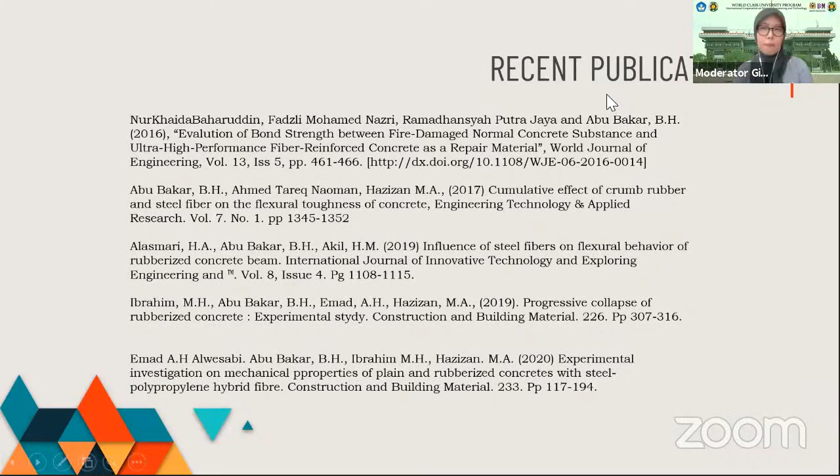He has also supervised and examined more than 23 supervisions. The latest of his students who has graduated, where he was the main supervisor, worked on the influence of crumb rubber aggregate and hybrid fiber on toughness and impact load of concrete.

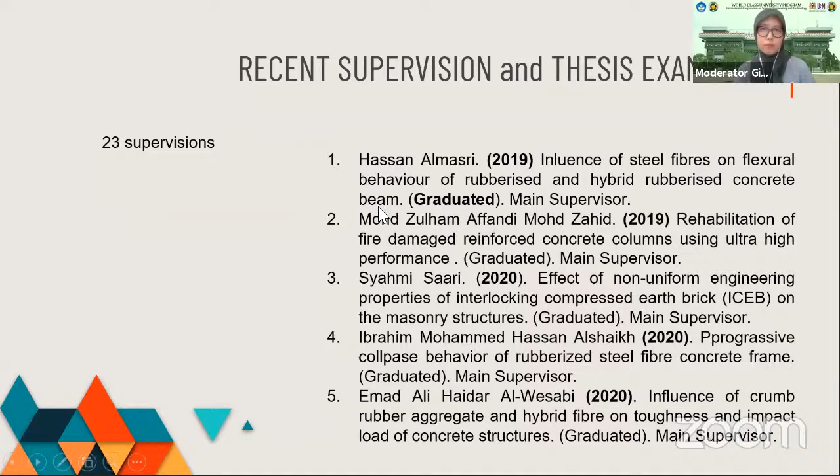As an external examiner, he has supervised 20 and examined 23 students. For your information, Professor Badorul Hisham bin Abu Bakar is also the external examiner of our own Secretary of the Postgraduate Program, Department of Civil Engineering of Universitas Sumatera Utara, Dr. Engineer Muhammad Aswin STMT, who received his PhD in Civil Engineering in 2018, with the thesis title The Performance of Reinforced Concrete and Reinforced Engineered Cementitious Composites, Dapped-End Beams.

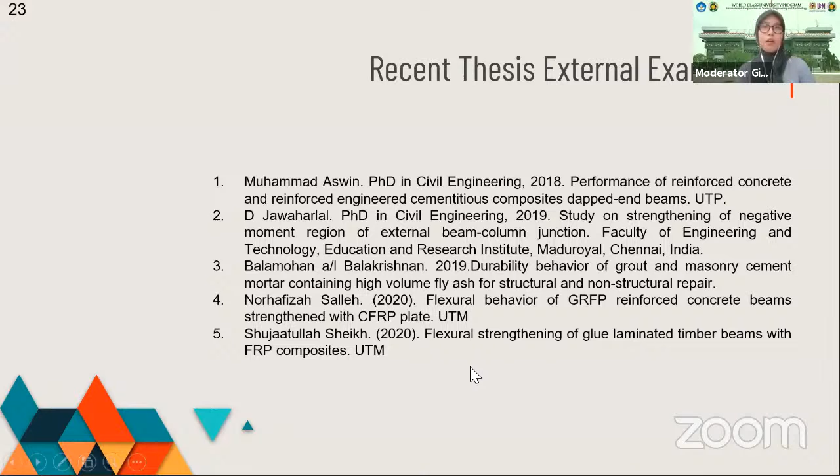Professor Badorul Hisham bin Abu Bakar is also the current supervisor of one of my colleagues, Engineer Nur Shamsi STMT.

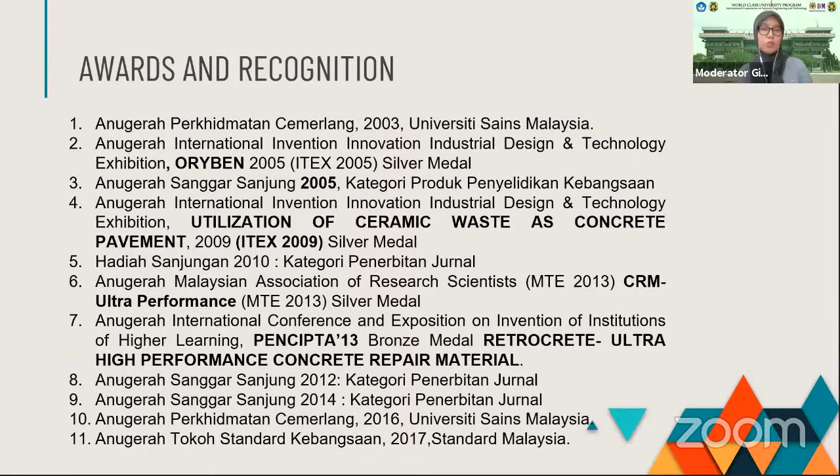For the awards and recognition, Professor Badorul Hisham bin Abu Bakar received lots of awards and recognitions, but I would like to highlight that he received a silver medal for the utilization of ceramic waste as concrete pavement, and also received the Anugerah International Conference and Expositions on Invention of Institutions of Higher Learning Pencipta 2013, and a bronze medal for Retrocrete ultra high performance concrete repair material. He also received Anugerah Sanggar Sanjung 2014 from Penerbitan Journal, and Anugerah Tokoh Standard Kebangsaan 2017 from Standard Malaysia.

For training, attachment and visiting, he was a visiting professor in Chungnam University in Daejeon, South Korea in December 2012. He was also a visiting professor in Salahuddin University in Iraq in 2009, 2013, and 2015, and he visited us last year at Universitas Sumatera Utara. The latest visiting professorship was at Osmangazi University in Turkey in February 2020, before the COVID-19 pandemic hit the world.

So I guess this is the kind of introduction that I would like to give for Professor Badorul Hisham bin Abu Bakar.

So without any further ado, Professor Badorul Hisham bin Abu Bakar, are you there? Yes, yes.

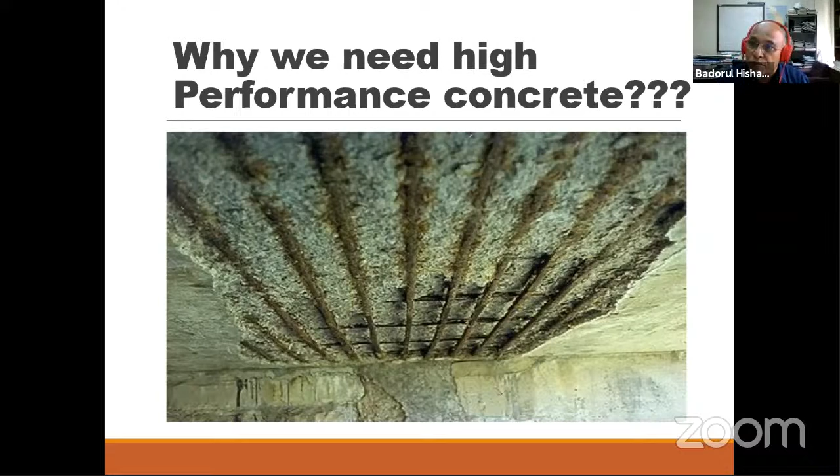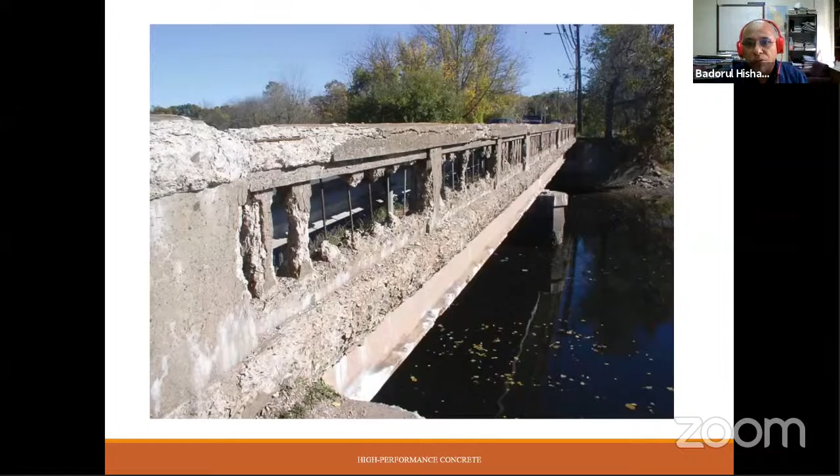And this is also concrete corrosion. Apart from corrosion, we have concrete spalling due to the aggressive environment, for example under chemical attack, or under impact load, leading to failure.

Next is creeps and shrinkage, one of the problems we need to tackle in construction when using concrete. Creep is a time-dependent movement of concrete under load. Shrinkage is also a time-dependent movement, and eventually the concrete will crack because of shrinkage and creep. You can see here there is a deflection due to creep, a time-dependent movement of the concrete. So we don't want that to happen.

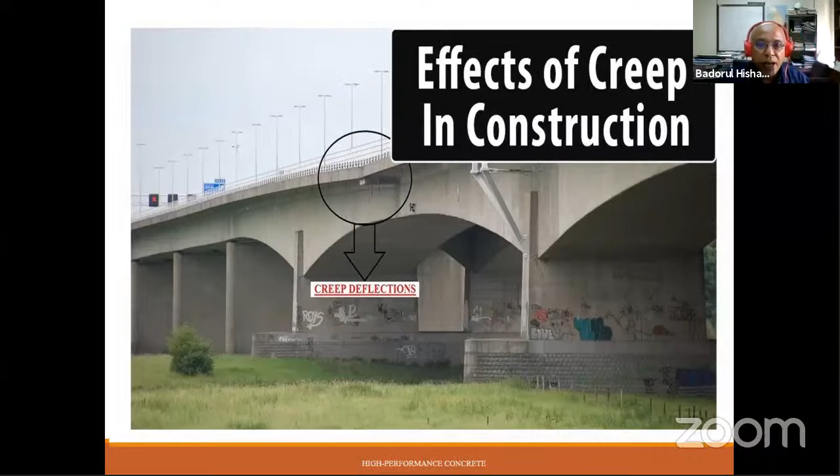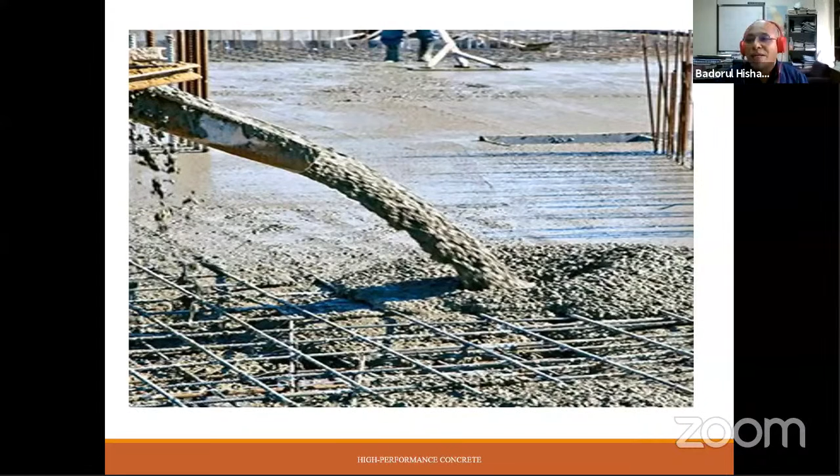And of course, when you talk about high performance concrete, what do you need? You need concrete with high workability, easy to flow when you pump it, easy to compact it. That's why in the previous lecture we talked about self-compacting concrete. So high performance concrete will basically also try to accommodate self-compacting concrete as well.

That's why we need to tackle all these problems, caused by insufficiency in certain areas of the concrete. So high performance concrete not only gives you better strength, not only gives you high strength concrete, but also tackles the issue of durability.

All the previous slides I've given you mostly cover issues of durability of concrete: concrete spalling, cracking of concrete, corrosion of reinforcement, and shrinkage and creep, which, even though time dependent, will eventually damage the concrete in the future. Therefore, this is what we call degradation of concrete, due to corrosion of reinforcement and also caused by mechanical, physical, structural, chemical, biological factors, and corrosion as well.

So all these issues can be solved by using high performance concrete, and the concrete members can serve in the long term.

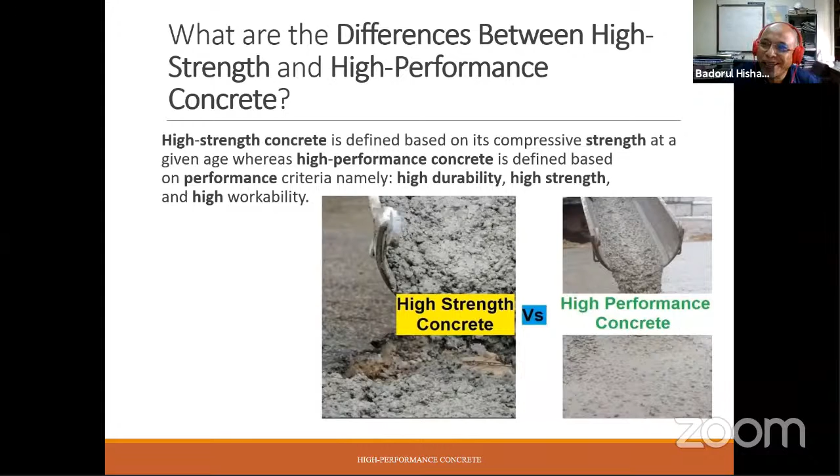When I speak, there's something echoing. Can you hear me clearly? Yes, Professor Badorul. Okay, sorry.

So high performance concrete is defined as concrete that meets a special combination of performance and uniformity requirements that cannot always be achieved routinely using conventional constituents and normal mixing, placing and curing practice. So we have to upgrade all these in terms of the constituents, the material of the concrete. Setting time could be earlier, and placing and curing practice is also a little bit different compared to normal or conventional concrete.

However, high-strength concrete is defined as concrete with a strength of 55 megapascals or higher, according to ACI. But if you refer to the British Code, this value is lower, considering 40 or 45 megapascals as already high-strength concrete. ACI defines high-strength concrete as 55 and above, but Eurocode is also different. The basic idea, or the basic need, is high strength, not performance.

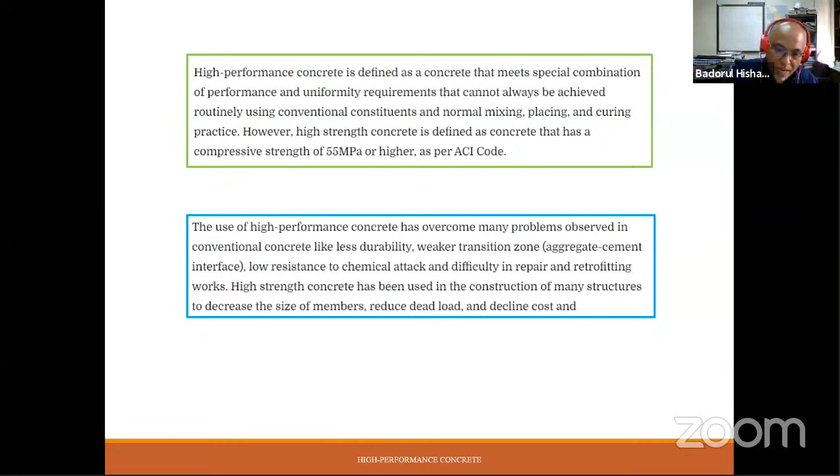For example, with normal concrete you need about 500 by 500 columns. With high performance concrete, you can reduce to 400 or 350, the size of the column, but you will attain the same strength, even higher strength, compared with normal strength concrete. That is the idea of high performance concrete.

Before we go further, we need to look into the characteristics of high performance concrete. Number one is high strength. The strength can go to 55, to 80, to 120, and so on, even up to ultra high performance.

That's a different issue. And high early strength. Why do we need high early strength? Because we need to save time. In conventional concrete, probably we have to wait 7 days, 14 days, and 28 days, even 90 days, for example.

With high performance concrete, you can reduce the early setting time, so you get high early strength. High elastic modulus is basically a correlation between high strength and high elastic modulus. The higher the strength, the higher the elastic modulus. That's simple.

And high abrasion resistance as well. Concrete is a very brittle material, right? If you have any abrasion or friction on the concrete, it will not easily fall off from the structures.

High durability and long life in severe environment. This is the problem with concrete nowadays—not able to protect themselves from severe environments. What are the severe environments? Sulfate attack, other chemical attacks, carbonation, chloride attack, and so on.

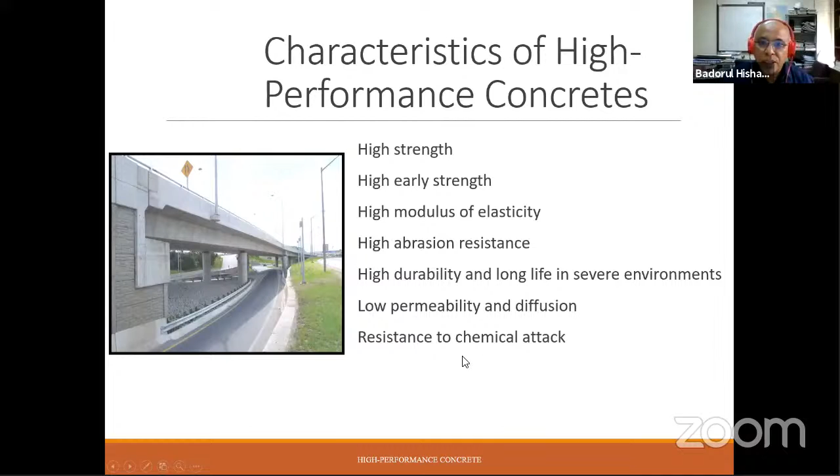And resistant to chemical attack as well.

Higher resistance to frost and de-icer scaling damage. This doesn't happen in Malaysia and may not happen in Indonesia. But in some parts of Indonesia I've learned you have cold weather, so they might have frost and de-icer scaling damage. I'm not sure, but of course in European countries they have this problem of freeze and thaw.

Toughness and impact resistance, yes—improve the toughness and impact resistance.

Volume stability, ease of placement. When you have high workability, it's easy to place and pour it, with no sticking in the pumping or shotcrete, for example. Compaction without segregation—as I said earlier, high workability that can be self-compacted is still under high performance.

And inhibition of bacteria and mold growth. But this issue is now debated, because nowadays you have self-healing concrete, where you need bacteria in the concrete so it can self-heal when you have cracks. That's a different issue we can talk about separately.

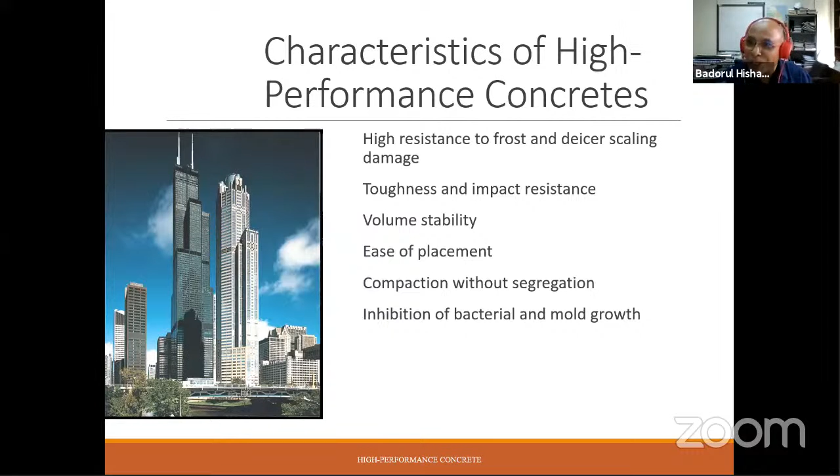Next, this is an important part of high-performance concrete: selection of material. The production of high-performance concrete involves important criteria, including selection of suitable ingredients for concrete, which should have desired rheological properties, strength, etc.

And we have to determine the relative quantities of the ingredients in order to produce durable concrete, and we have to select proper materials carefully.

Proper ingredients ensure that the concrete will attain high performance. So these are the materials: Portland cement, blended cement, fly ash, slag, silica fume, calcined clay or metakaolin, calcined shale, superplasticizer, high range water reducer, hydration control admixture. All these contribute to the cementing material, contribute to the durability and high strength.

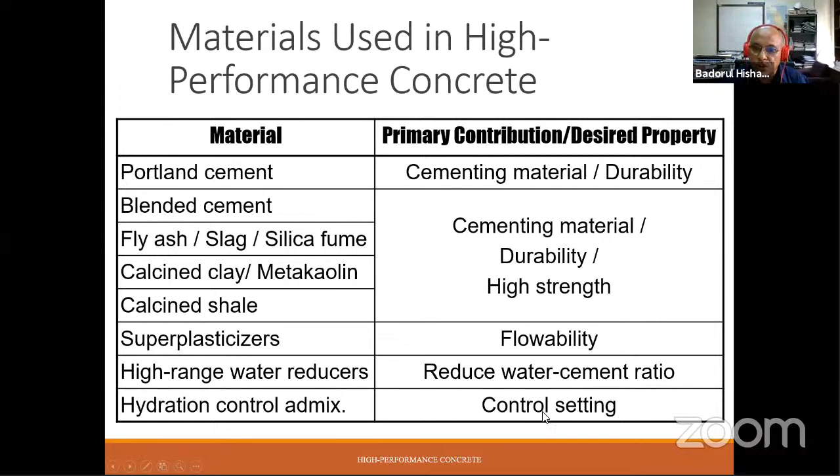In concrete, once you use a lot of fine material, you need a lot of water. But as you all know, using excess water is not good for concrete. So we have to reduce this by introducing superplasticizer, to maintain the required workability and also control the setting of the concrete.

And this is another material as well: retarder, accelerator, corrosion inhibitor, water reducer, shrinkage reducer, ASR inhibitor. ASR is alkali silica reaction.

To avoid any alkali silica reaction, you have to select proper aggregates, because some aggregates are affected by ASR, which is not good for the concrete. At the end of the day, you can see something fluid coming out from the concrete, a whitish fluid, which is not good. So make sure the aggregate has no ASR, alkali silica reaction.

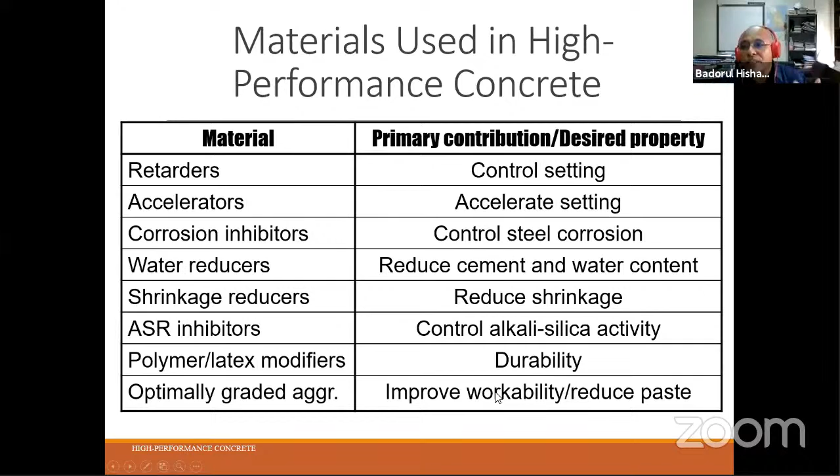And polymer latex modifier, this is also for durability, and other materials. These are some of the materials used in high performance concrete.

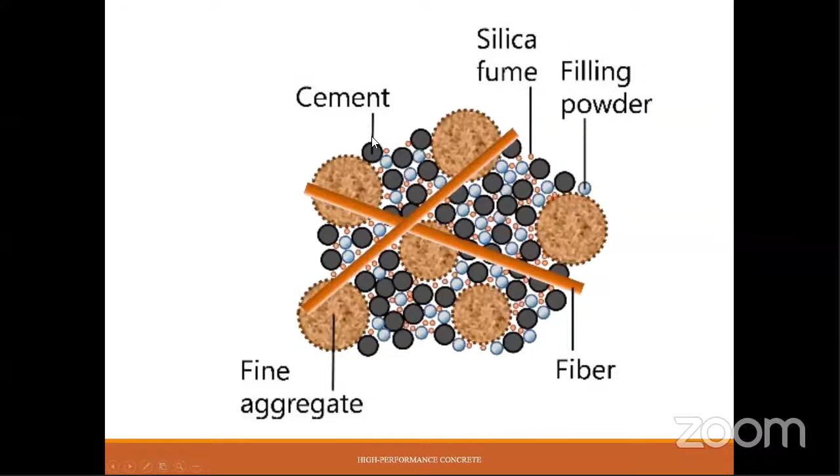If you look into this diagram, it's a very simple diagram. Take out the fibers, we don't want to see the fibers. So these are the cement, silica fume, filling powders - it can be GGBS, it can be fly ash and so on - and also aggregates, the fine aggregate.

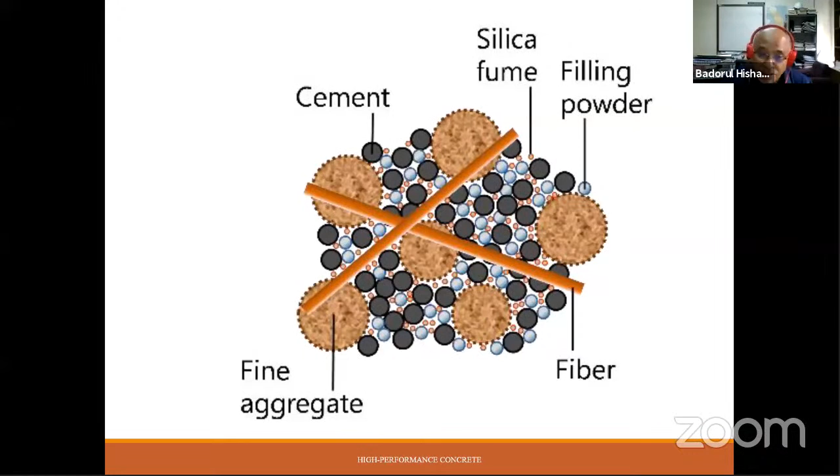So all these are hand in hand, they are together. You can see if there are any voids here, they will be harmful to the concrete. But in this case, they want to increase the tensile strength of the concrete. Later we can discuss about it.

Silica fume will contribute to the high strength concrete, and the concrete becomes very dense. In order to produce high strength concrete, make sure the concrete is dense - densification of the concrete through all this material.

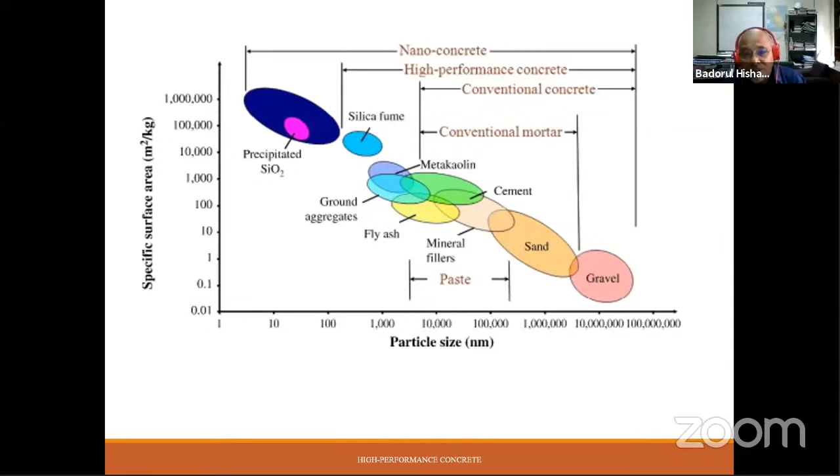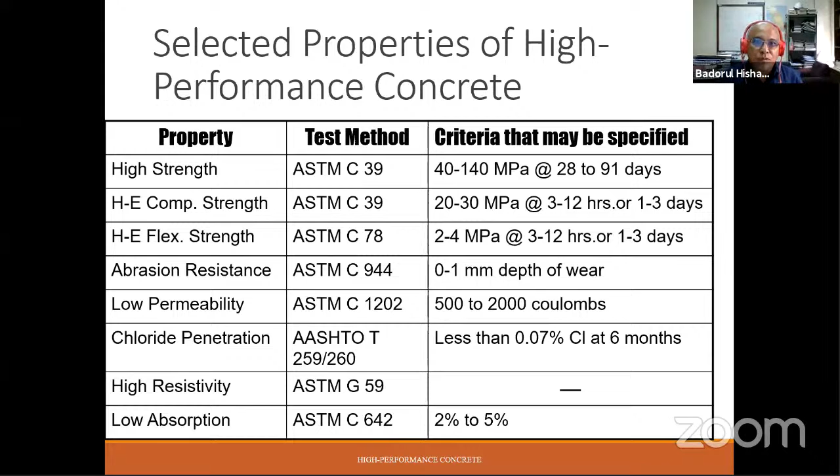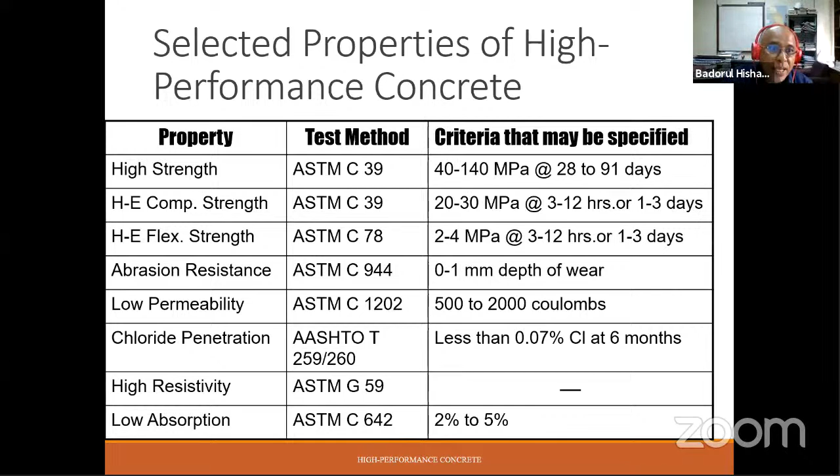These are the properties. We end up with these selected properties of high performance concrete. If you look to ASTM, you can see all these required properties: high strength, abrasion resistant, low permeability, chloride penetration - these serve as a guideline for you to achieve if you are referring to ASTM. So all these are important properties, and also other properties as well.

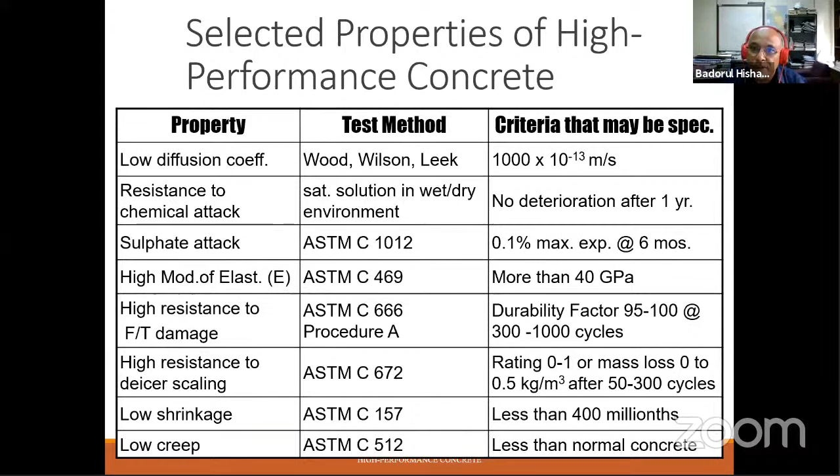For example, low diffusion coefficient - diffusion refers to the ingress of gas, a parameter to look at to stop the ingress of gas. Resistant to chemical attacks, sulfate attacks, high modulus of elasticity, high resistance to freeze-thaw damage, high resistance to de-icer scaling, low shrinkage, and low creep. These are the important properties that high strength, high performance concrete should have.

I was discussing about the high early strength. Why do we need high early strength? Because we expect the high performance concrete to have high early strength. When you are using cement replacement materials like RHA, or fly ash, for example, in most cases all this material, apart from the cement replacement material, normally they are involved in the second phase of hydration.

They are involved in the second phase of hydration. That means the early strength will be delayed. But you have to modify it with other material, retarder or reducer, so that you can achieve the high early strength.

So the high early strength, according to ASTM, between 3 to 12 hours, or between 1 to 3 days, you can achieve 20 to 30 megapascal. At this strength, you can strip off your formwork. This is in compression.

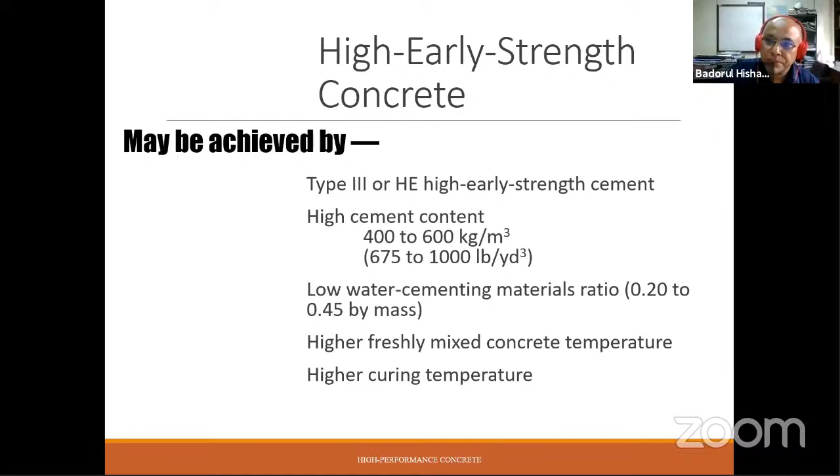It can also be achieved using chemical admixture. There are a lot of chemical admixtures. You can use retarder, air entraining agent, and so on. And silica fumes, that is the mineral admixture basically.

And also steam or autoclave curing, as I mentioned earlier, under elevated temperature. Insulation to retain heat of hydration, and special rapid hardening cement. So these can be achieved to attain high early strength concrete for high performance concrete.

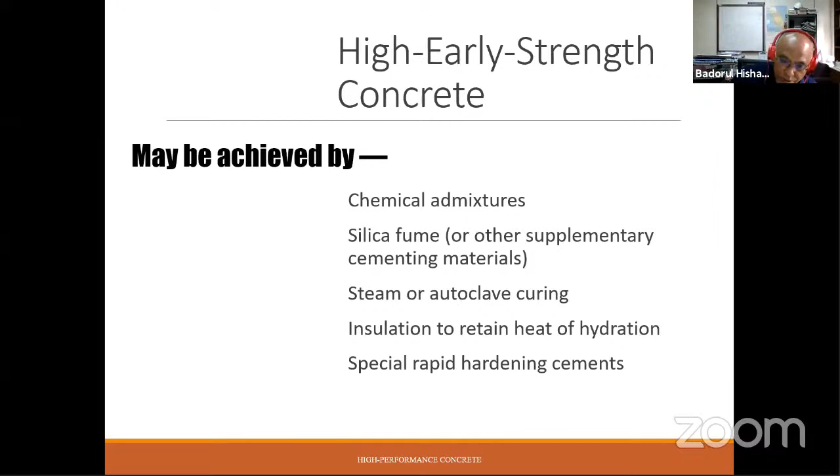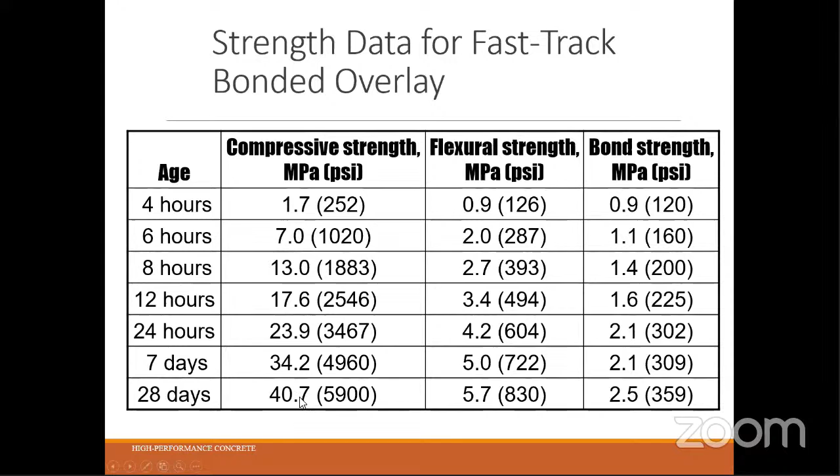Strength data from the fast track, you can see the increase of strength from hours to 28 days. So these are the things, but here it's only up to 40.7 megapascal. It can increase more, up to 91 days for high performance concrete as well.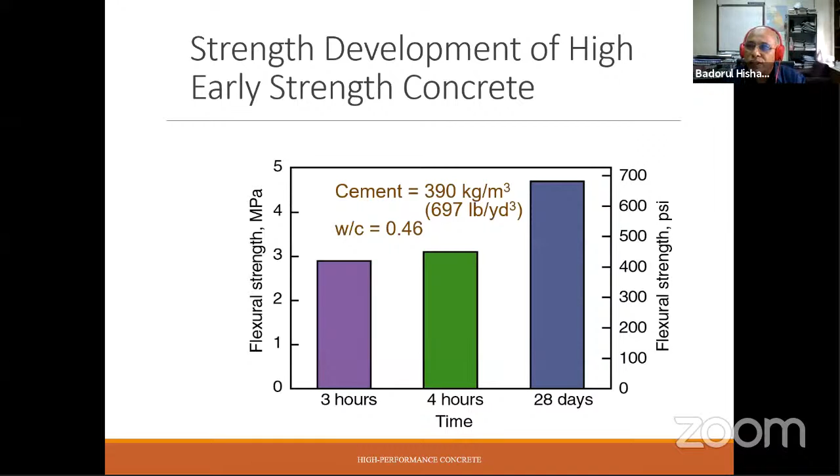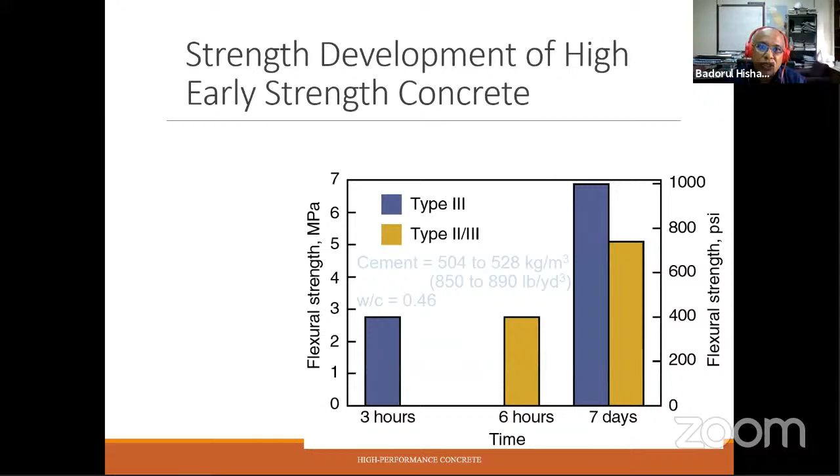So the strength development of high early strength concrete, you can see the flexural strength and also the times in hours, with 390, which is a low amount of cement, and with a very high amount of cement. So there is a difference in the early strength of concrete in the flexural strength as well as in compressive strength.

So the blanket insulation, as I mentioned earlier, standard cure or insulating blanket, this is a different type of curing method. You can have insulating blanket to cure and protect the concrete, especially at early age, so that there is no influence of ambient temperature or relative humidity.

In Malaysia and Indonesia, the relative humidity is not very crucial. But if you go to European countries, for example, in some countries the relative humidity is very low, so it will affect the hydration process.

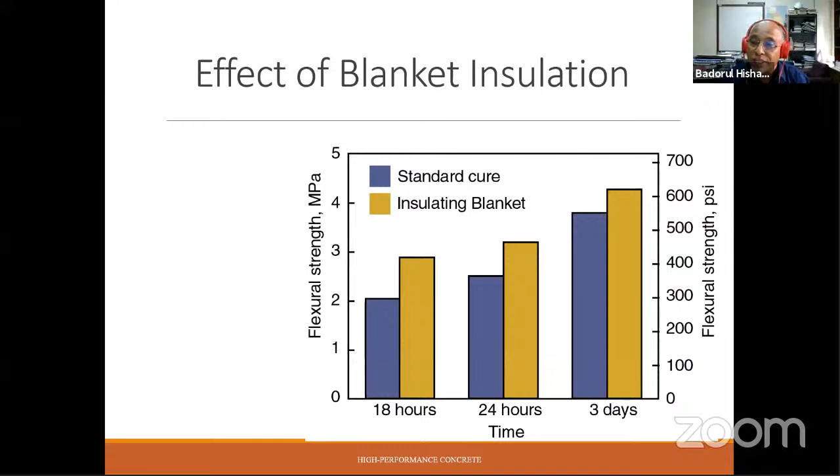Let's say in some countries the relative humidity is 45%, and the temperature can go up to 50 Celsius. So it's very high temperature, very low relative humidity, and of course it will affect the hydration process. So you can install a blanket to insulate the concrete members.

Cement. Physical and chemical characteristics of cement play a vital role in developing strength and controlling rheology of fresh concrete. Fineness of the cement affects the water requirement for consistency, for example.

When we look for the cement to be used in high performance concrete, one should choose cement containing as little C3A as possible, because the lower amount of C3A, the easier to control the rheology, or the lesser the problem of cement superplasticizer compatibility. Finally, from the strength point of view, this cement should be finely ground and contain a fair amount of C3S.

Okay, so you have to keep C3A lower and also a fair amount of C3S to promote the hydration process. Basically cement, we have to test, as you know, based on the mortar cube test, based on the concrete cube test. Here we are using 100 cube test, and also the days of testing: 3 days, 7 days, 14 days, and so on. Also the amount of cement plays the vital role, the main role in developing the strength of the concrete.

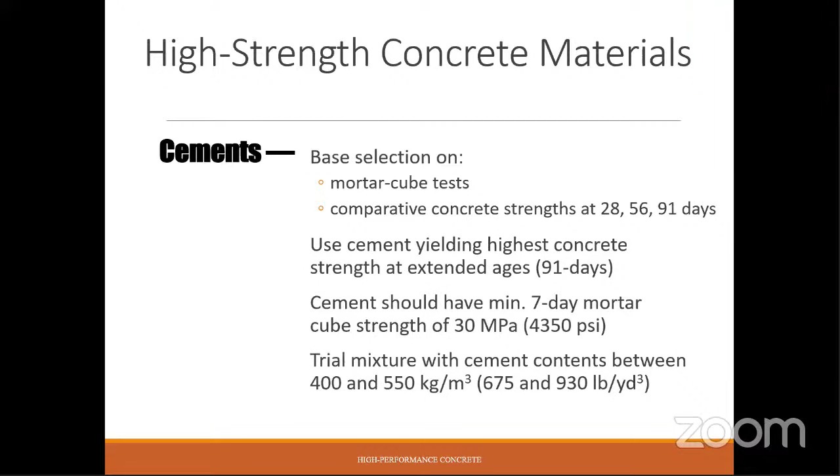Look at the aggregates. There are two types: one is fine aggregate, the other one is coarse aggregate, of course. Aggregates in concrete, 70% of concrete contain aggregates, meaning that basically you should have strong aggregates in order to achieve a strong or high strength concrete. That's important, because the cement, fly ash, all those kinds are the binders, but the core, the important part is aggregate.

As I said, we have two types of aggregate: one is coarse aggregate, the other is fine aggregate. The coarse aggregate is the strongest and should be the least porous component of concrete. If you have porous aggregate, it's no good. There will be a lot of absorption, and also the transition zones will be weaker if you have a weak aggregate.

So in this case, for the high performance concrete, normally the size of aggregate is between 9.5 to 12.5 millimeter, or up to 15 millimeter maximum. Even when we prepare the ultra high performance concrete, we are using 14 millimeter. You can ask Nur Samsi, I think she knows about the ultra high performance concrete. Combining the single size of required grading allows for closer control and reduces variability in concrete.

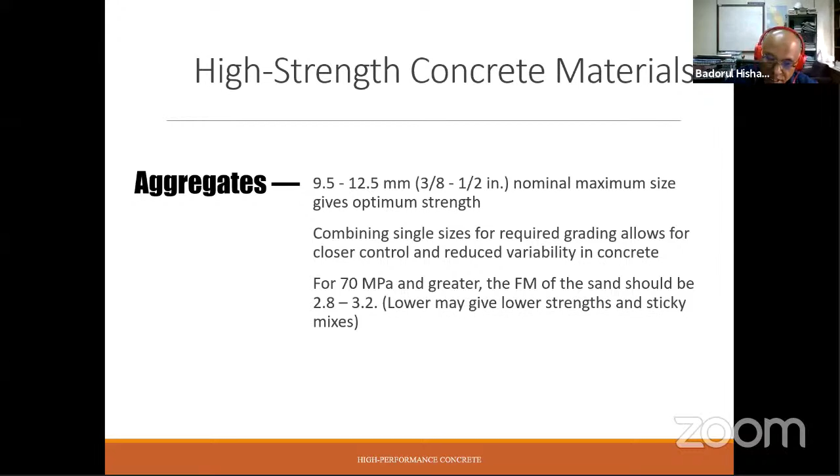This is supplementary cement material, or we call it mineral admixture, for the high strength concrete. You have fly ash, silica fume, or slag, often mandatory, and the dosage between 5 to 20% or higher by mass of cementing material. In some specifications, maximum of silica fume should not be more than 10%.

According to the research, fly ash, RHA, POFA, and other SCM, supplementary cementitious material, normally less than 20% -- that is the most usable in the market. I don't know, because if you put more, they'll need more water and more reducer, which is not good to the concrete. So they must keep it at a certain limitation for the concrete.

And these are the materials which can be used in the high performance concrete. And these are the major differences if you compare the high performance concrete and the conventional concrete, with all this material.

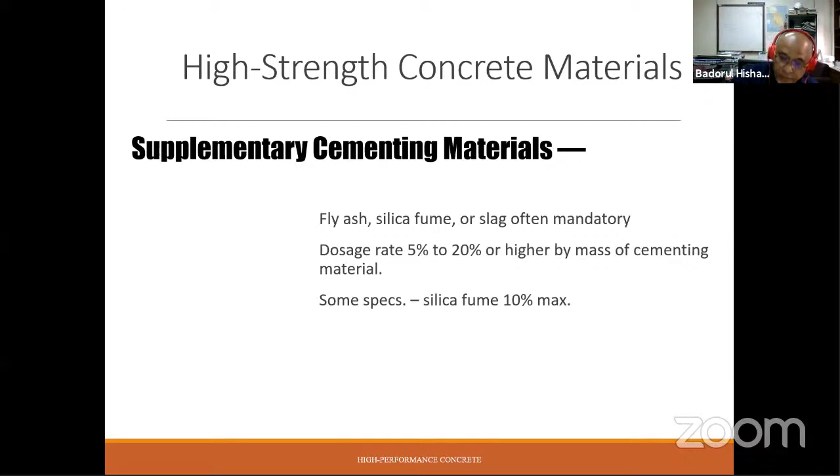Then admixture, as I mentioned earlier, this is what we call chemical admixture. Previously you can call it a mineral admixture, but here a mineral admixture plus supplementary cementing material -- this is what we call chemical admixture. The chemical admixture is an essential ingredient in the concrete mix because it will increase the efficiency of the concrete paste by improving the workability of the mix, thereby resulting in a considerable decrease of water requirement.

As I said, you need water in concrete, but not too much. If you have a lot of water, it will create a lot of voids. Once you create a lot of voids, there will be porosity, there will be more permeability and so on, which is not good. So by introducing this admixture, use of water reducer, for example retarder, or the superplasticizer, is mandatory in the high strength concrete. High water reducer, okay.

Air entraining admixture is not necessarily desirable in producing high strength concrete. Sometimes air is mandatory because air will allow the concrete to move easily, because you provide some repellence in the concrete between the materials, between the ingredients. But then of course there is a limitation in using air entrainment.

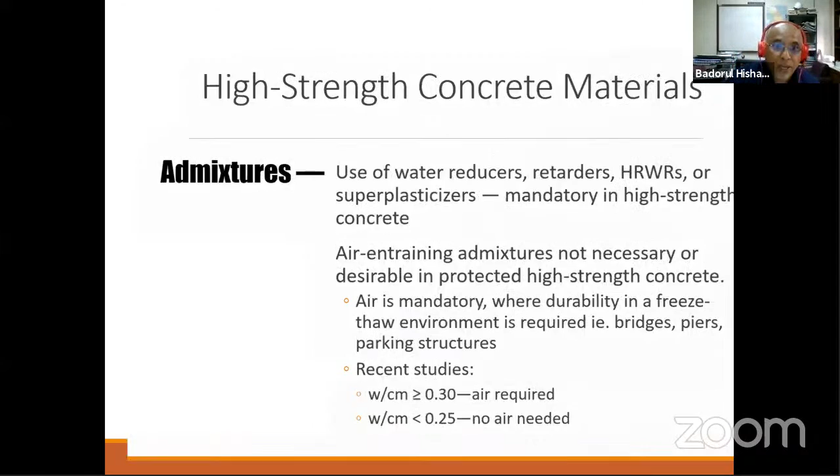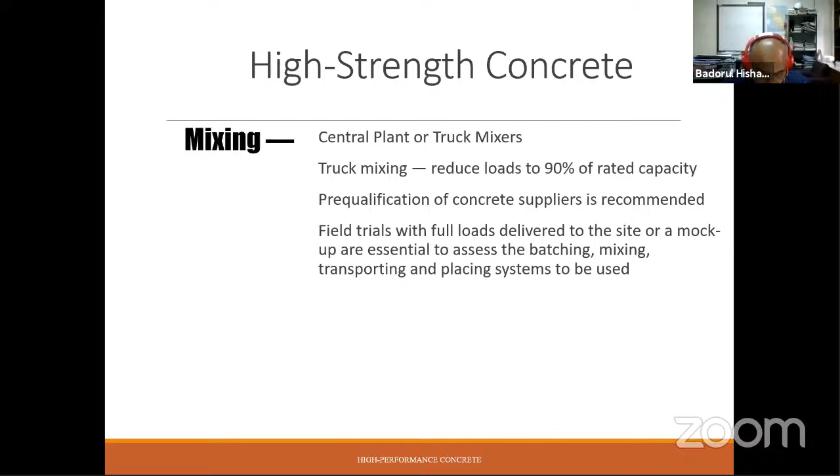Placing, consolidation and curing. Delay in delivering and placing must be eliminated because you must make sure about the setting time, and the distance between the factory and the project. Sometimes they make it on site, which is better, especially if you have a huge project, then they will manufacture the concrete on site. That's good, there's no issue on delivery and placing. In placing the concrete, you must have a certain height to pour the concrete, otherwise it becomes segregated, bleeding, and so on. That has to be avoided.

Also curing, and consolidation, which is very important to achieve strength. Compaction is considered as consolidation as well. By introducing self-compacting concrete, you don't have to use vibrators to compact the concrete. Of course, the concrete can be compacted by itself.

Slump is generally between 180 to 220, to ensure you will get the required workability. A little, if any, bleeding, fog or evaporation retarders have to be applied immediately after strike off to minimize plastic shrinkage and crusting. After you pour the concrete, if you don't treat it properly or cover it, it will develop plastic shrinkage the next day or after 3 days, showing cracks on the surface, which is not good for your concrete.

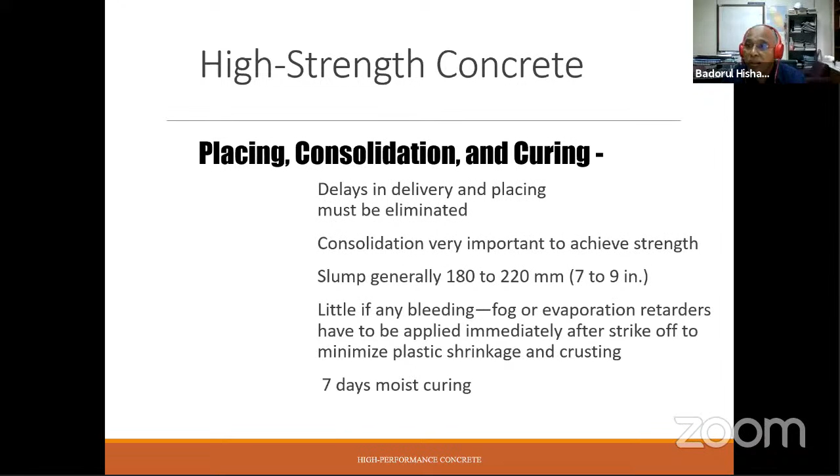Curing is also very important, because you need to cure it properly. Otherwise, as I said earlier, you need insulating or spray on the concrete. You can have different types of curing, under autoclave curing or under elevated temperature, for example. There are so many methods in curing, but moist curing, or water ponding for example, is very good for curing and saves cost.

These are the mix proportions and properties of high strength concrete, basically related to high performance concrete as well. Those are cement, silica fume, and fly ash. This is what we call a ternary mix proportion, and this is a binary mix proportion. So you can choose between two: if you need fly ash and silica fume, or cement with only silica fume.

These are the results of the properties of high strength concrete, but can also be considered as high performance concrete. And this is another mix with very high cement content, plus silica fume and fly ash - one with fly ash, the other without. This will get you more strength compared with the previous mixture.

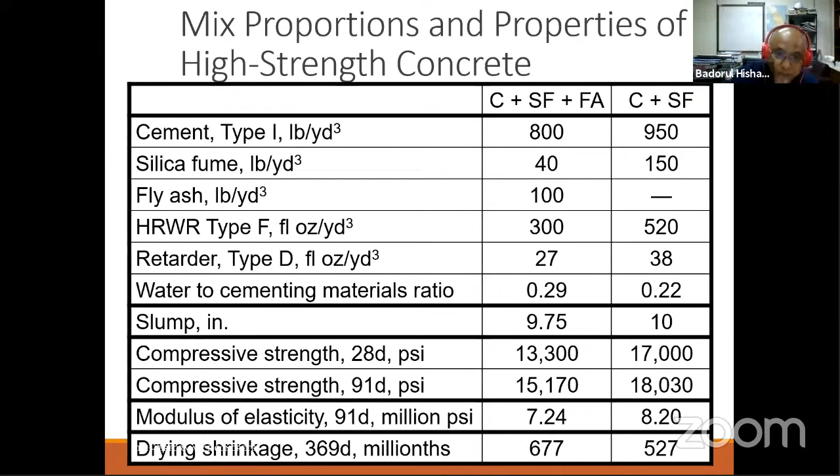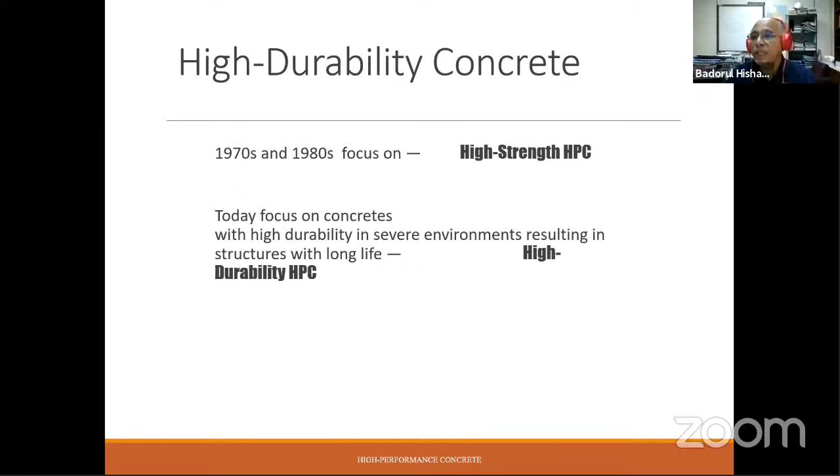High durability is an important parameter for high performance concrete. In those days, we only referred to strength, because as an engineer, when you order concrete, you ask what is the strength, what is the grade of concrete you want - not the durability. You don't think about durability. But today, since we have seen a lot of damage due to durability issues, we have to focus not only on strength, but also on achieving high durability - high performance.

Durability issues that high performance concrete can address include abrasion resistance, blast resistance, permeability, carbonation, freeze and thaw resistance, chemical attacks, alkali silica reactivity, and corrosion rate of rebar.

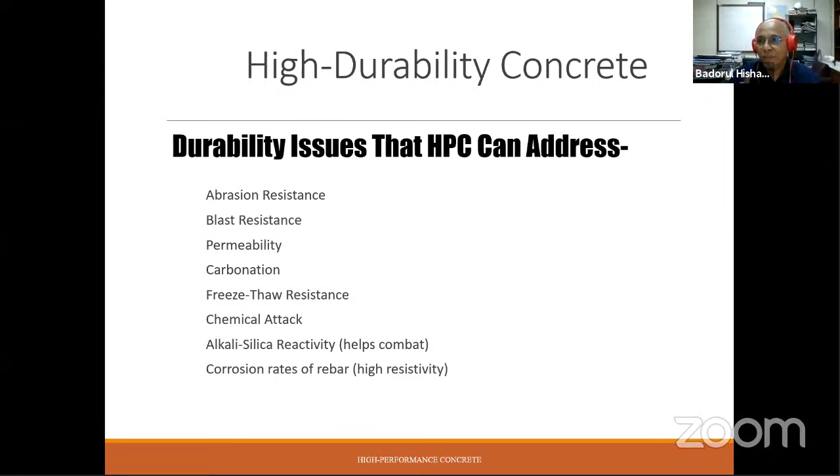This is basically about rebar in concrete. The environment around the rebar should be in a high alkali condition. If it is acidic, then corrosion will take place. So how to maintain the alkalinity of the concrete, especially around the bar, that is an important issue to discuss.

Applications of high performance concrete. When you talk about the application of high performance concrete, it has the properties of high strength, compressive strength, workability, durability, and density.

So the type of concrete here should have high strength, self-compacting properties, chemical and mechanical resistance, and high density with low permeability. The area of application is not fixed - you can go for high-rise buildings, infrastructure, dams, stadiums, or any huge structures. But how do you combine all these types of requirements?

All these requirements can be accommodated in high performance concrete. You mix into one and it becomes high performance concrete. So this is the properties and area of application of high performance concrete.

Properties of high performance concrete: increase of durability by lowering the permeability. Why? Because once you have a dense and stronger concrete, you improve the microstructure of the concrete, so there will be less permeability. If you put water on it, the water will take years and years to penetrate into the concrete media.

Increase of concrete density makes it stronger and more compact. It increases compressive strength, improves the ratio of flexural strength to compressive strength, increases resistance to corrosion attacks, increases chemical resistance, and improves abrasion resistance.

Reduction of segregation and bleeding - we discussed this in self-compacting concrete, bleeding is not good. It also increases resistance to alkali silica reaction by selecting a proper type and size of aggregates, and improves sulfate resistance, low chloride ion penetration and diffusion, and reduces porosity and permeability as mentioned earlier.

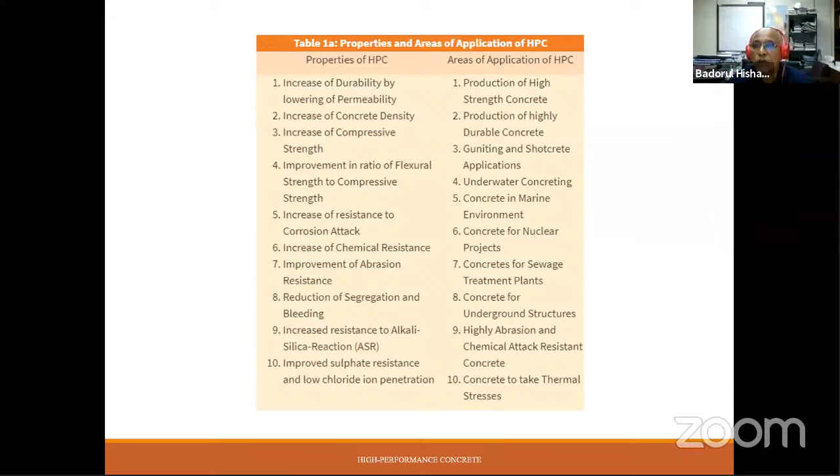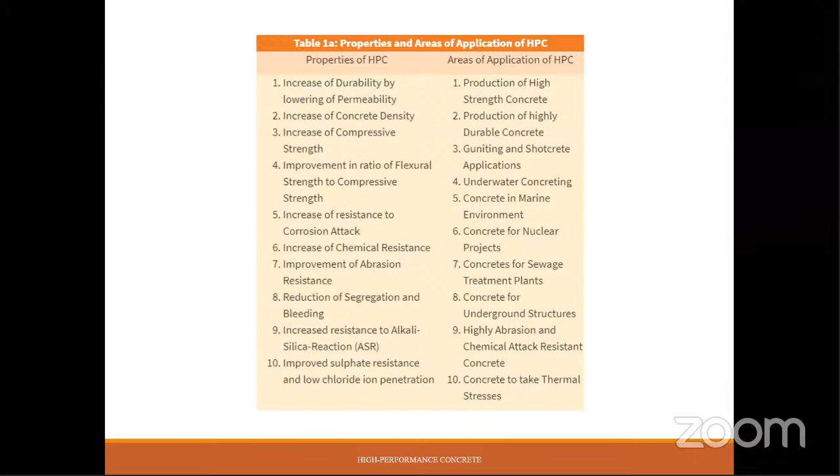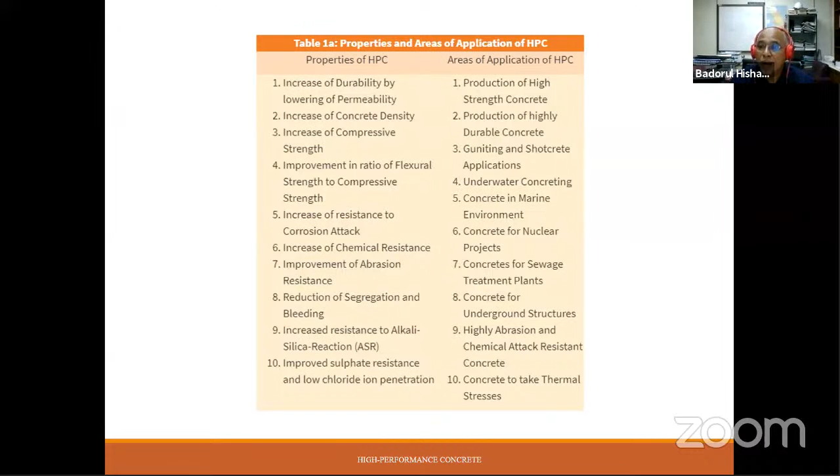So these are the properties of high performance concrete. For applications, you can have huge applications, especially for huge structures, mega structures - not only for buildings, but also for special structures such as sewage treatment, nuclear projects, and marine environments. All those are required performances which can be provided by high performance concrete.

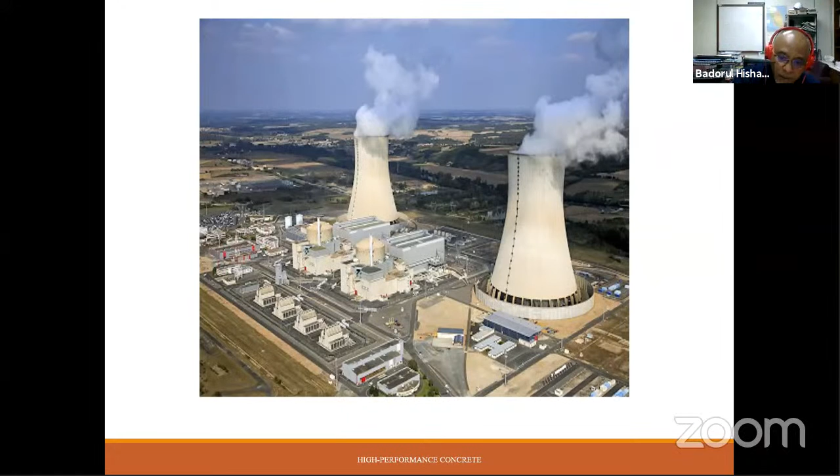Besides the advantages that I have already mentioned, there are disadvantages of high performance concrete. Number one, it requires extended quality control beyond normal concrete.

When you manufacture or mix this concrete, it must be properly designed to ensure all the selective materials perform very well, so that the structure can perform very well with high quality control - when you design it, mix it, place it, compact it, and so on. All this must be assured, what we call extended quality control.

Number two, it's costly. Looking at the material, silica fume is very expensive compared with cement and other materials. Nowadays for ultra high performance concrete, you have to use selected fine aggregates, silica sand for example. In our case, we have to import silica sand from China - I'm not sure if Indonesia has silica sand, very fine and containing highly mineral content.

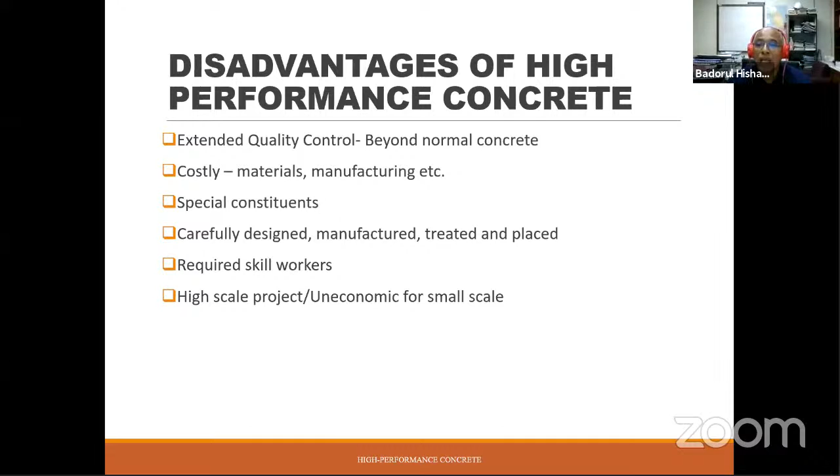As a conclusion, high performance concrete becomes an important material for all structures under aggressive environments, as it enhances the visual impact and will be able to tolerate severe conditions. And it's highly durable, as I mentioned earlier, and reduces the size of sections.

Size of section can be reduced if you compare with conventional concrete. With conventional concrete you probably need a bigger size, but with high performance concrete we can reduce the size of the structure member, while getting the same strength and better performance.

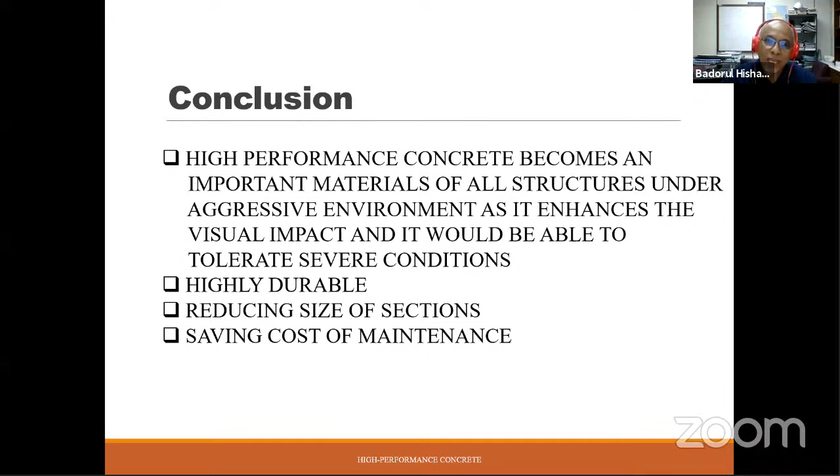And of course, when you improve the microstructure of the concrete, it becomes denser and stronger, which will save the cost of maintenance. Earlier, I showed how concrete gets damaged due to weakness in terms of durability. With this material, hopefully it will save the cost of maintenance in the long term.

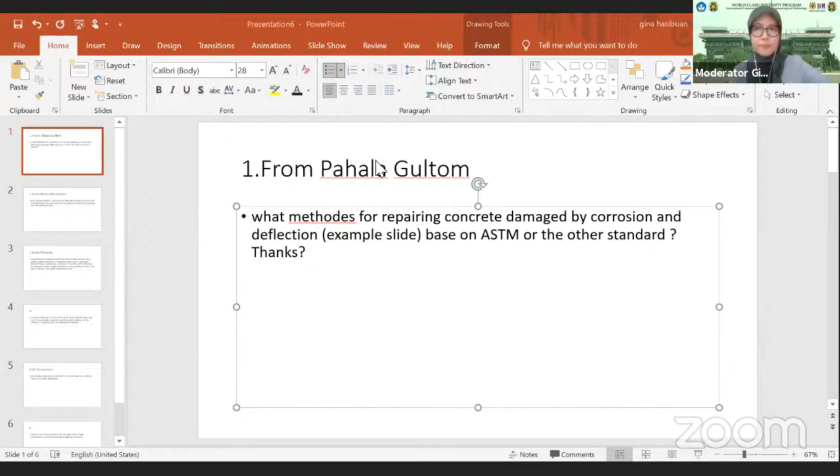Can I answer? Yes, you can. There are several methods in repairing concrete. Before we carry out any repair project, we have to do an assessment of the concrete first, to see how severe the damage is, the level of damage, and what kind of damage it is. Is it only concrete spalling? Are there only cracks? Is it because of reinforcement corrosion, and so on?

If you have cracks, you can seal them with epoxy - that is the concrete repair. If you have concrete spalling without affecting the reinforcement, or 'tulangan' as it's called, you can patch it with a certain type of material. In our research, we are using ultra high performance concrete as a repair material - you can use that material if you want.

And then you can use a jacket - you can enlarge the structure. For example, if you need to repair a column that has a problem, you can replace the reinforcement and enlarge the size of the column. If I could draw something it would be easier to explain, but you enlarge the size of the reinforcement and the size of the column. That is the repair method.

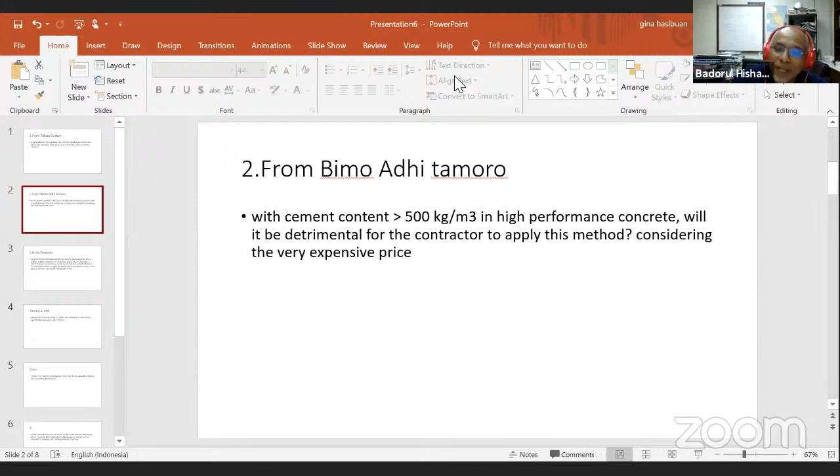Yes, because of course in order to attain high strength concrete, you have to add more cement - that you can't avoid. Plus, with silica fume, as I said earlier, silica fume is costly and quite expensive compared with cement. Am I right? So of course, the cost will be higher.

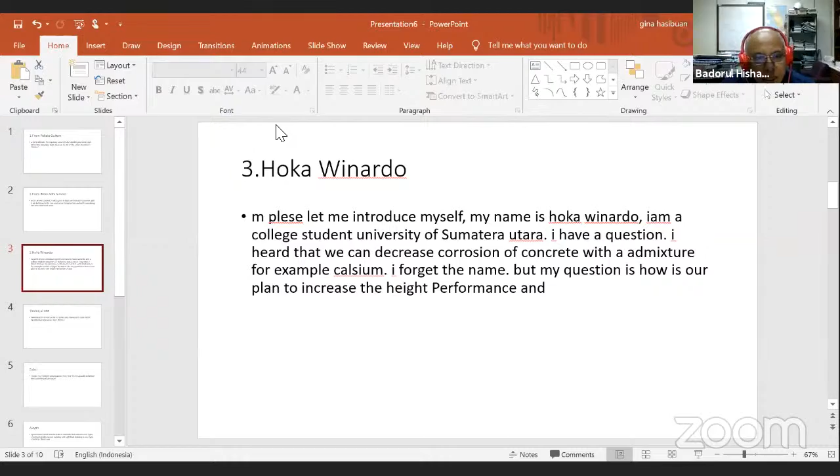Well, calcium in terms of what? Is this calcium part of the binder or what? I'm not sure. In what form is the calcium? In binder form or in liquid form, I'm not sure the question. Because of course calcium, we have calcium in cement. In cement material we have calcium, isn't it? But I think calcium, as if, it's not good for it. I'm not sure what the question is, but calcium to me will be corrosion. Am I right?

Maybe calcium oxide, Prof? Oh, calcium oxide, okay, calcium oxide in the cement hydration. I see, yes, so that means increasing the calcium oxide in the cement hydration means the amount of calcium is more. Am I right, if you compare the composition of concrete? The what do you call it, the setting time? Yeah, that's right, I think Dr. Aswin already answered it, the setting time. Yeah, that's right, okay.

Okay, so we go to the next question, Prof. Okay sure, yeah right, we go to the next question from Thareq al Aziz. He asked how to make high-performance concrete in a project area with improvised materials and tools.

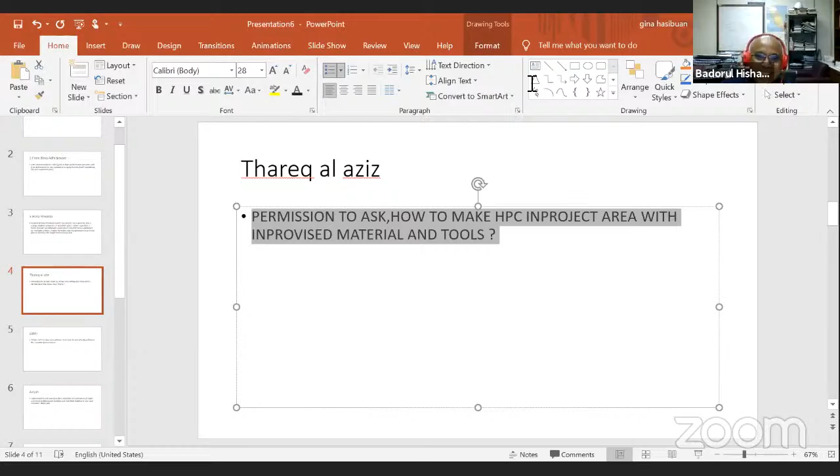Well, that's a good question, but it's quite difficult to answer. Because, of course, to make this concrete better, I mean the material and tools must be sufficient anyway. But then, as I said, because of the disadvantage of material, you should have high quality control. So meaning all that equipment, special equipment and so on must be there, must be sufficient anyway.

Okay, we go to the next question. How does fly ash actually influence the concrete performance, Prof?

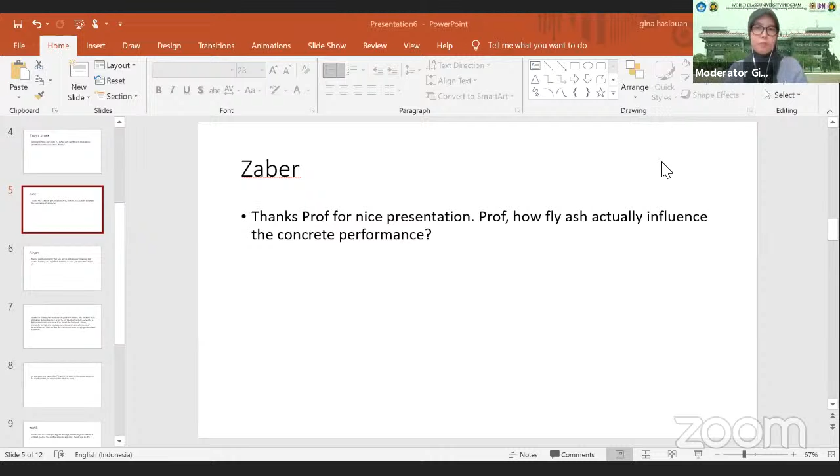Okay, fly ash is a pozzolanic material, meaning you need water to make it react with the cement. But in most cases, the fly ash involves in the second phase of hydration. Once you have C2S, C3S, C3A, C4AF reactions, then the calcium hydroxide reacts with the fly ash in the second phase of reaction.

That's why the amount of fly ash should not be more than 20%. If you have more than 20%, it will be unreacted and doesn't work—it becomes a filler. So during the hydration process there are two products: one is the hydrated product, CSH, calcium silicate hydrate, and the other one is the unhydrated product.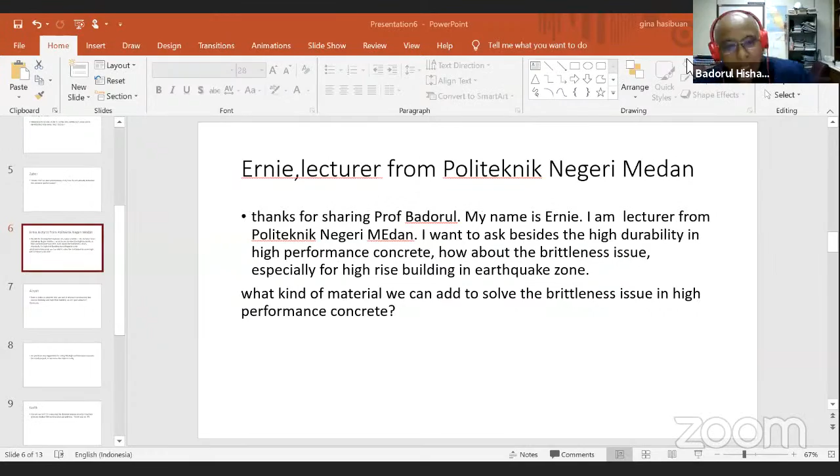Okay, you know concrete is a very brittle material. The higher the strength, the more brittle it can be - that is the nature of concrete. But you need to improve the strength capacity or the tensile strength of the concrete in order to withstand in the seismic zone, as mentioned by Ernie from Polytechnic Medan. Normally you have to use fibers - that is number one. Fibers can be anything: artificial fibers, steel fibers, there are so many fibers.

Number two, we found that a combination of fibers and rubber may increase the strength of the concrete to withstand the earthquake, because rubber is a very soft material - we are using rubber waste. So the rubber can absorb the impact load, and we increase the toughness and the impact load of the concrete.

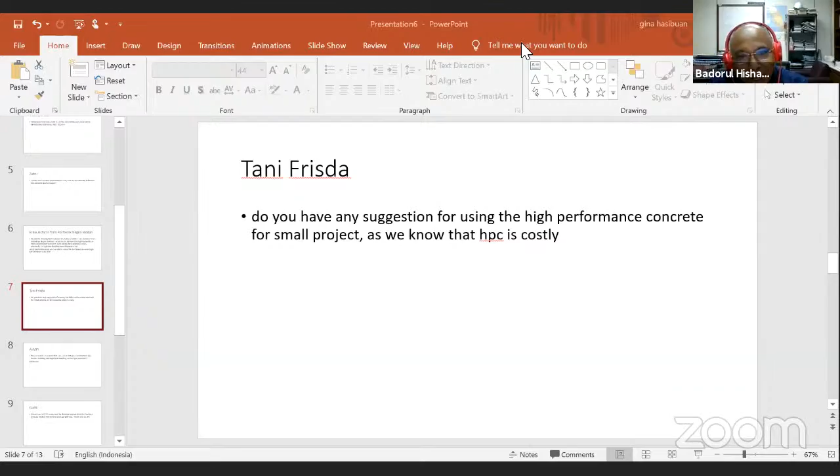Okay, Prof, we continue to the next question from Tani Frisda: do you have any high performance concrete small projects? Well, how small is the project - is it a bungalow project? I don't know how small. What do you mean by a small project? What I'm talking about is a huge project like a dam, a power station, nuclear power station, water tank, sewage plant and so on - that's a huge project. But a small project, how small is it? Maybe for housing. Oh, if you have a housing estate, a huge housing estate, that's fine.

What I'm saying is that if you have a small bungalow, then it's not worth it—normal strength concrete will be enough. Because a bungalow house normally only has concrete in the main structure, isn't it? The rest is brick, right? Only the main structures use concrete, the rest is brick.

From Taufik: Can we use HPC for repairing damaged pile caps? Yes, high performance concrete can be used. I think Mr. Taufik, you should discuss with Nur Samsi regarding the repair material—she should know. You can use it, but then with the piling, is it underwater or above water? Can I see the question again?

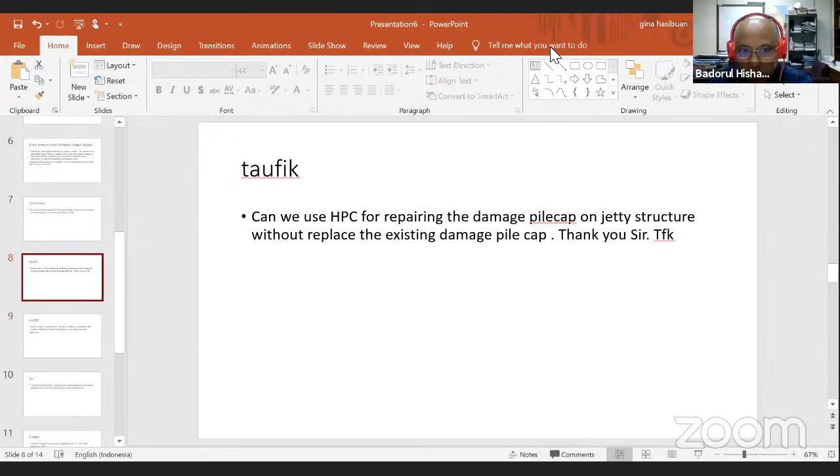Oh okay, yes, why not? Can we use high performance concrete for repairing damaged pile caps on jetty structure? This is all underwater, without replacing the existing damage—oh no, you need to replace. You need to take out, or you need to have a new, what you call it...

Because you have a repair material and a damaged material, one of the most important issues is bonding. You cannot patch the repair material onto the damaged concrete. You need to take off all the damaged concrete so that the bonding between the existing and the new concrete will be intact. Otherwise it's not good. You have to take out all the damaged concrete first, then replace with new concrete. If not, it doesn't make sense because of the bonding, and the damaged concrete is still there. So the existing concrete has to be repaired so we get good bonding between the new repair material and the existing concrete.

Right, should we move on to the next questions, Prof? Okay, there are a lot of questions. Oh really? So until when? Until 3:30, ten minutes more. Yeah, okay, okay.

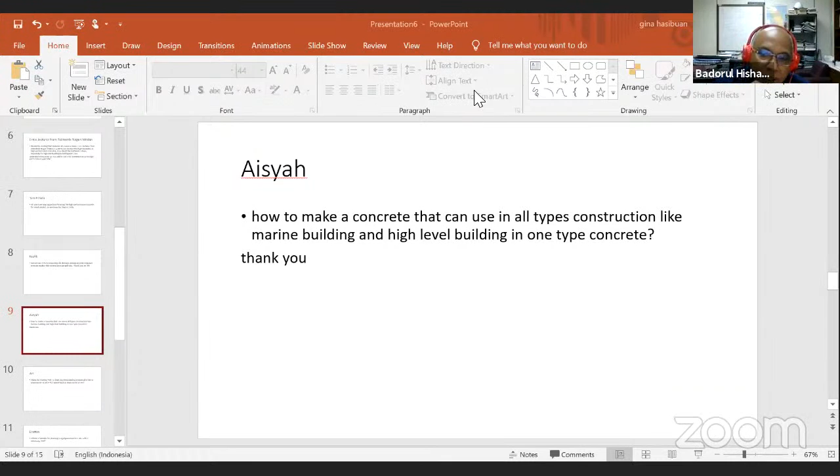Aisyah asks: how to make a concrete that can be used in all types of construction, like marine buildings and high level buildings, skyscraper, tall buildings—one type of concrete?

There are different grades of concrete in one project. For infrastructure around, which is not involved in supporting the structures, probably the grade is lower, 40 or 30 or 25. For the huge structures, you can have high performance concrete, grade 70, 60, 50 and so on. But for the surrounding structures, you don't need high strength, high performance concrete, because making it all high performance, the cost will be higher.

Okay, so we move on. Is there anyone from the audience that would like to ask by clicking the raise hand button? So you could ask orally to Professor Badorul? Yes, you can ask orally actually. Oh I see, no I mean, can I ask questions? We have...

Ari, yeah? Thanks for sharing, Prof. Is there any measured experiment results in using waste to get HPC, waste such as brick waste?

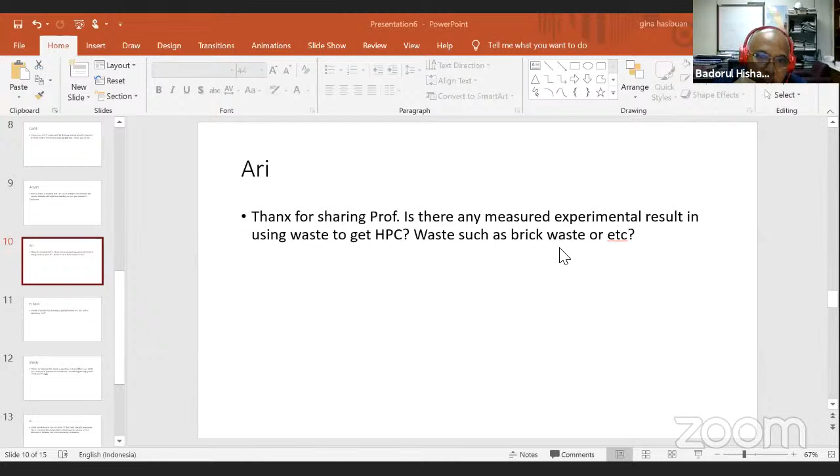Not at this moment, because brick waste is basically used to replace the aggregates. Waste from bricks, you have to crush it and prepare it for aggregate. In fact, the amount of bricks waste is not 100% unless you have very good bricks, like fired clay bricks. Fired clay bricks are good bricks, good to use as aggregates. The percentage can be 40%, 50%, or 100%, but normally less than 100%. For high performance concrete though, so far I don't see it, because high performance concrete needs very strong aggregates, as I mentioned earlier.

In fact, the size also reduced. Normally we use 20 millimeter aggregates, but the size for high performance is between 9 to 10 to 12 to 14 and so on. But I'm not sure about high performance—you can do research if you want, to attain high performance concrete using waste from bricks. But bricks vary—you can have fired clay bricks, calcium silicate bricks, stone blocks, or concrete blocks. There are so many types of waste from bricks and blocks.

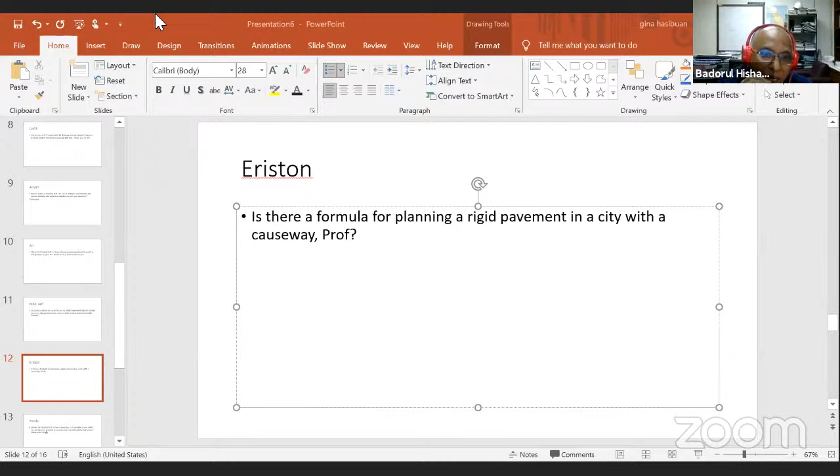It is a formula, because a rigid pavement is actually related to the highway material. Some of the highways have a concrete pavement. Okay, you have seen concrete pavement? Yes, there is a concrete pavement, with high performance.

In one of the stretches in the North-South Highway, we have one portion made of concrete. There are a lot of problems anyway, but they still serve until now. It is especially quite noisy; you can hear your tires and so on. It's not comfortable for the drivers.

But at one point, normally at a petrol station, they make the pavement with concrete. There is a formula, of course.

Right. So we move on. There is someone, Mr. Harrison. Mr. Harrison Ingot Hasudungan, do you want to ask your questions orally? If not, from the chat here I can see a few questions. Yes, I already gathered the questions from the chat box. Oh, I see. Yes, Muhammad Arif, Assalamualaikum.

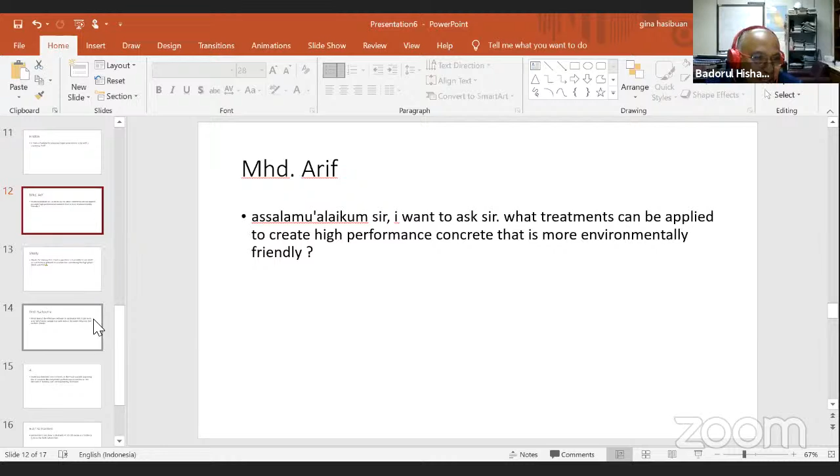Okay. Right. So should we move to the last questions, because it's almost 3:30. I'm sorry, I cannot answer all the questions. A lot of questions. Yes, lots of questions, because your presentation is very interesting. This one is from Dedi Saputra, Prof.

What kind of effective method to optimize high performance concrete in an area full of water springs, the dam, or lower elevation from the surface? In this case, I've seen in projects nearby they are using high performance concretes, but when they pour the concrete, they pour with bentonite in the surrounding casing. So once they pour it, they pour with the concrete. That means it will not interrupt the hydration process.

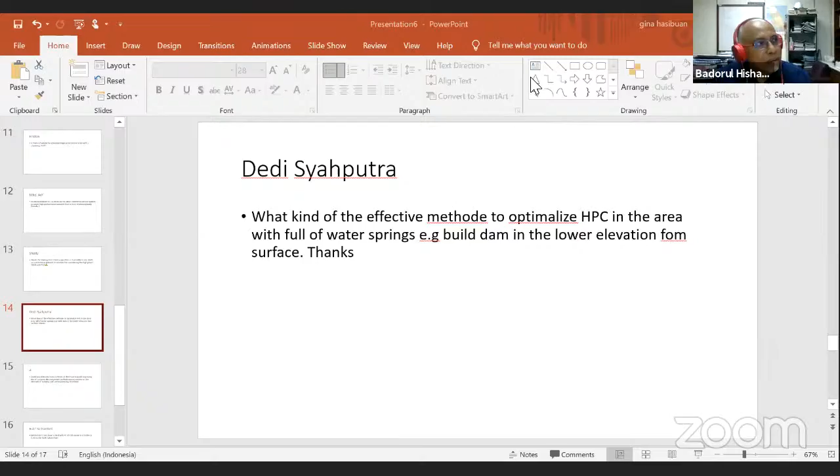During the construction of piers, columns, piers for the bridge, they excavate the soil coming up, but when the soil comes up, they put bentonite in it, and there are a lot of chemicals whatever, and after that they pour the concrete in it, so it will not be affected by the surrounding area in the sea.

Okay. So do you still want to answer, or a kind of closing statement from Professor Badorul? Say again. Do you want to answer one last question? Yeah, please. Yes, okay.

So the question is coming from Kusuma Permadi, whether the type of cement affects the ultra high performance concrete.

You have type 1, type 2, type 3 cement, different types. And cement between manufacturers is also different. I have experience testing cement from different manufacturers. I think Dr. Aswin knew about it. We have a few cement manufacturers here, not many, from Perak Hanjoong, from Tasek Cement, for example. The quality of cement are different, I would say. Of course if we look into the chemical composition, they are almost the same, but probably they are using different clinker.